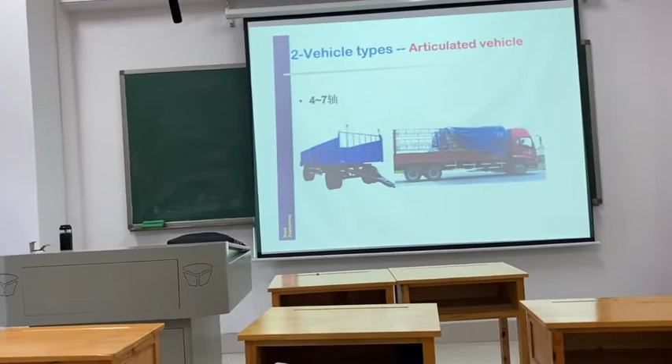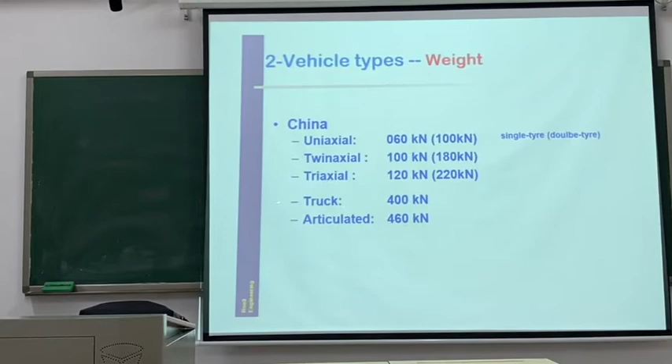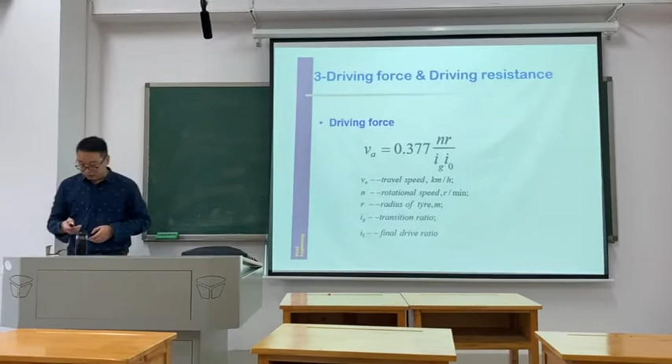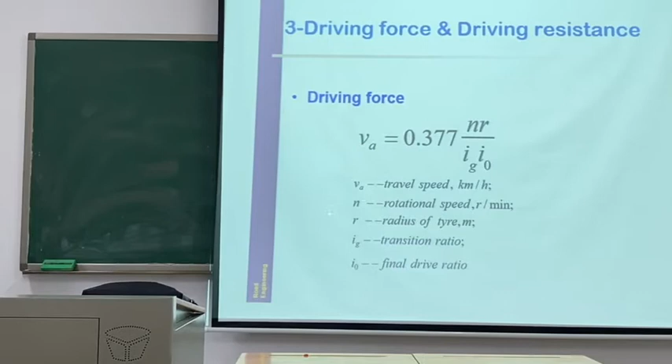Now we talk about driving force and driving resistance. Driving force, travel speed is equal to 0.377 and rotation speed, radius of tyre, IG is transmission ratio, i0 final drive ratio. So when we load these parameters, we can know VA.

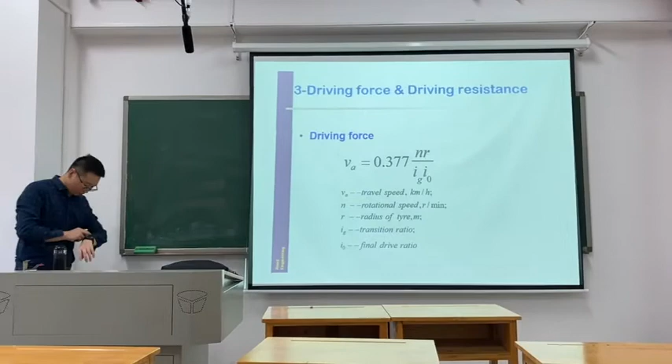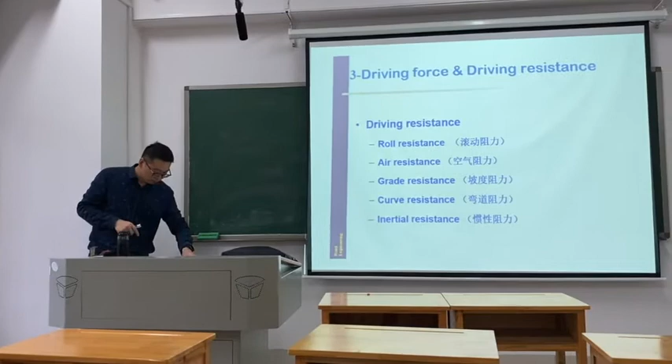Driving resistance includes 5 aspects: rolling resistance, air resistance, grade resistance, curve resistance, and inertial resistance. In Chinese: rolling resistance, air resistance, grade resistance for different grades, curve resistance is just like a curve, and inertial resistance.

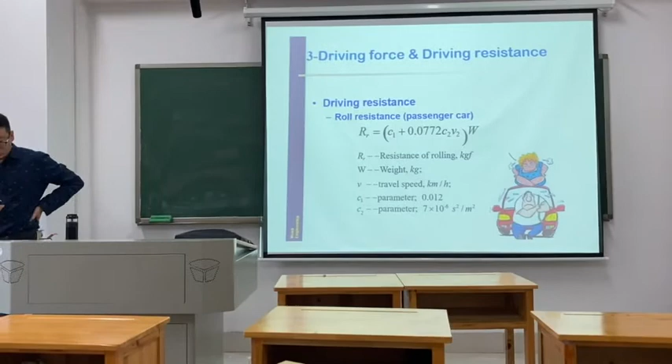What is rolling resistance? Just for passenger cars, you can know that rolling resistance is the weight. Parameter C1 is 0.012 and C2 for passengers is just like this. So, travel speed, when we know the weight, travel speed, and the parameters C1 and C2, we can calculate the rolling resistance.

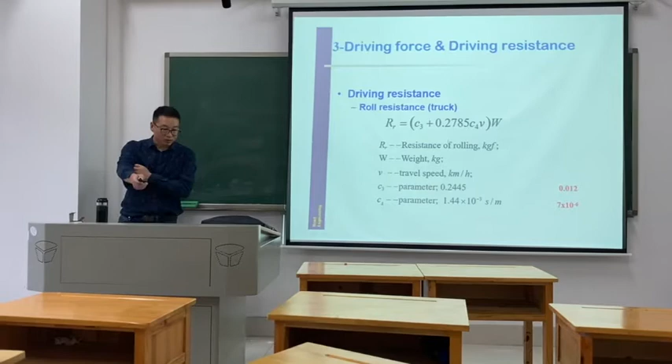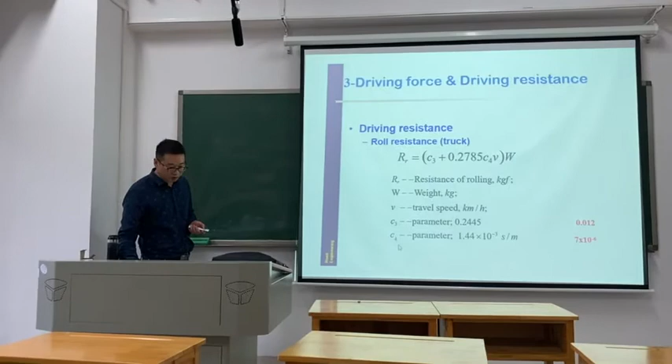But for trucks it is different. We can know these equations: weight, travel speed, C3 and C4, but this is different from the rolling resistance for passenger cars. We can know that C3 and C4 is larger than C1 and C2.

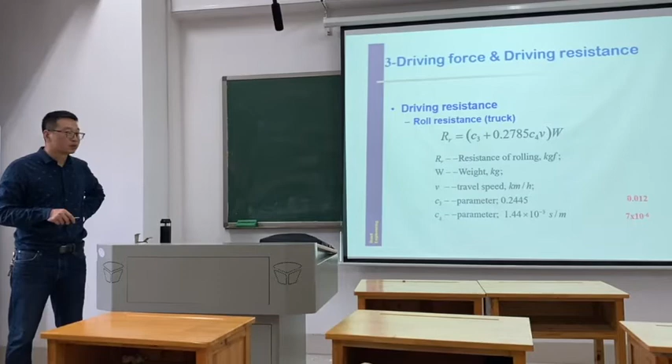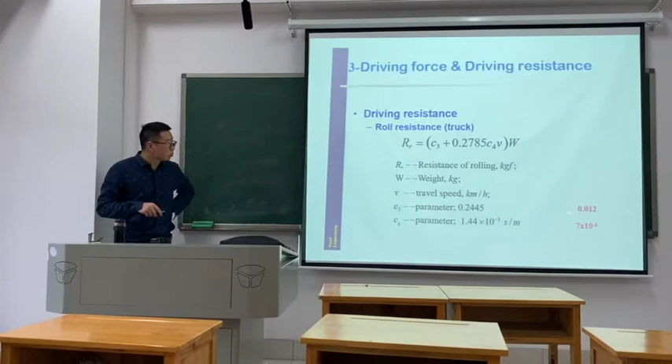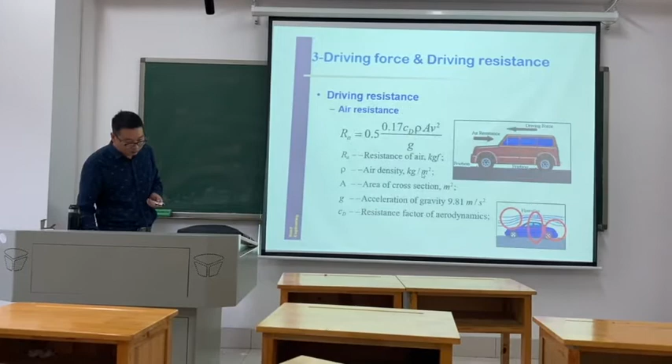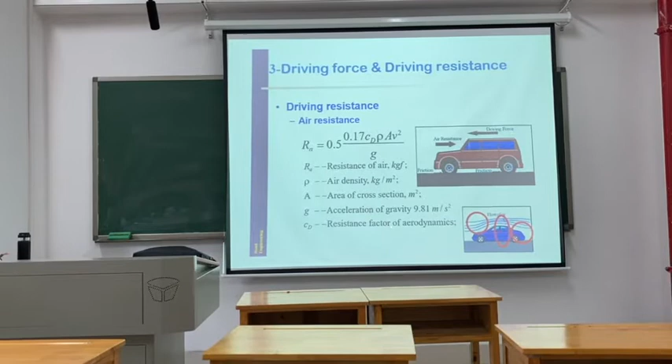Air resistance. Now, air resistance is determined by air density, area of cross section, acceleration of gravity, and resistance factor of aerodynamics. But the resistance factor of aerodynamics is different for different types of cars. The area of cross section depends on the type of car. So we can know this.

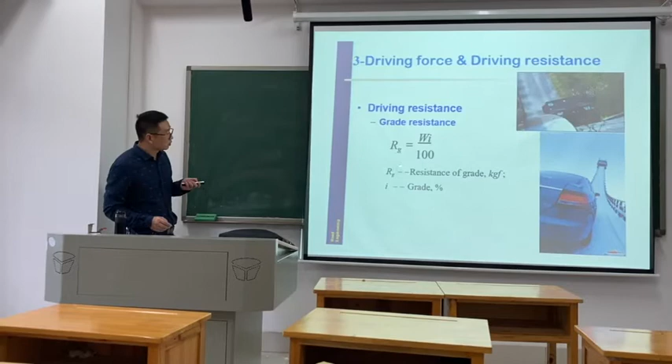Grade resistance. The grade of a road is different for expressways - the grade is less than 3%. But for low grade roads, it may be up to 8% or 9%. So grade resistance is calculated according to these equations. Resistance of grade, W is weight, so we can calculate it according to these equations. The larger the grade, the resistance of grade is large.

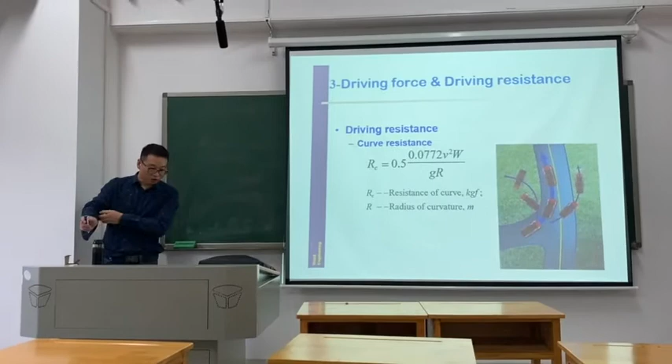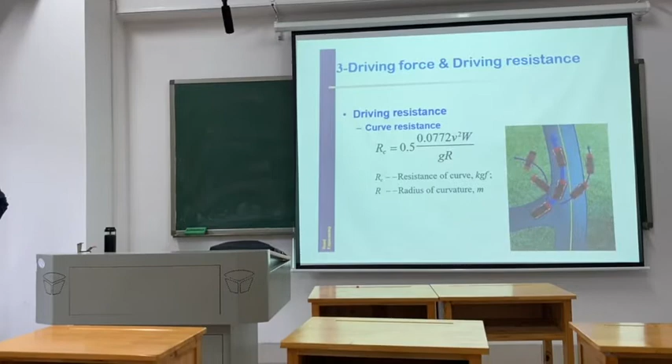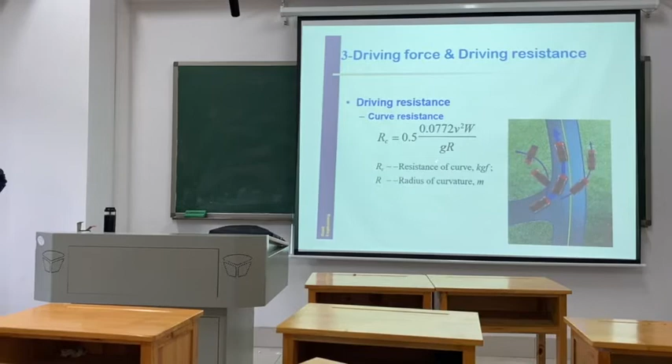Curve resistance. Curve resistance is given by speed, weight, V squared. W is weight, G is gravity, R is radius of curvature. So the larger the radius of curvature, the smaller the curve resistance. When we know the speed, car weight, gravity, and the radius of curvature, we can know the curve resistance.

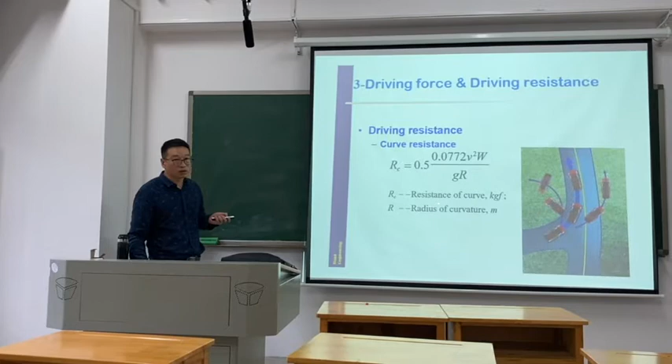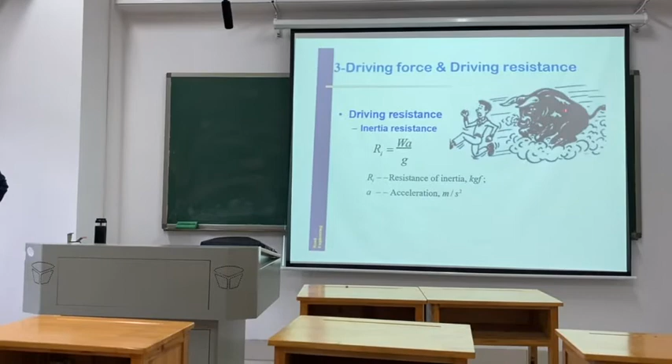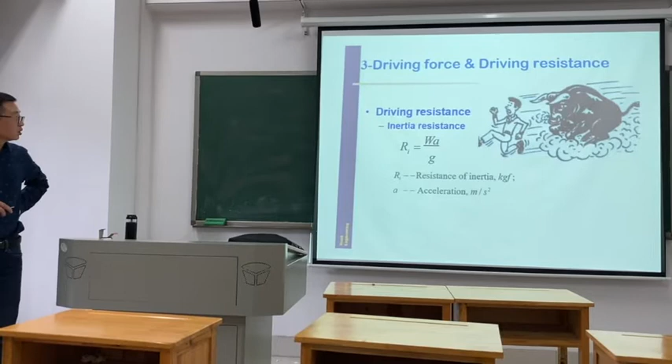Inertial resistance. Acceleration, weight, acceleration, and gravity - just like this. In inertial resistance, we can calculate it by these equations.

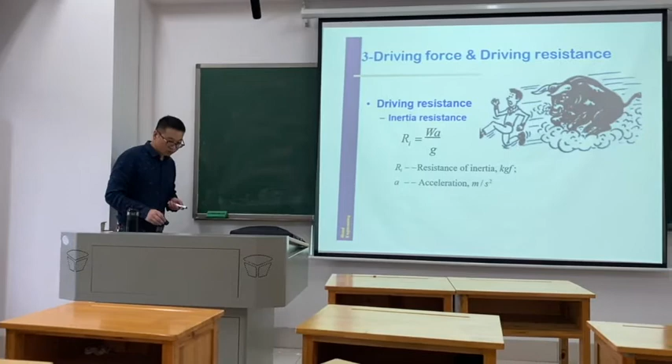Now, driving resistance is the total driving resistance - rolling resistance, gravity. Driving resistance is minor in this aspect. Main factors are weight and speed. So when the weight of the car is large, the driving resistance is... what? Large.

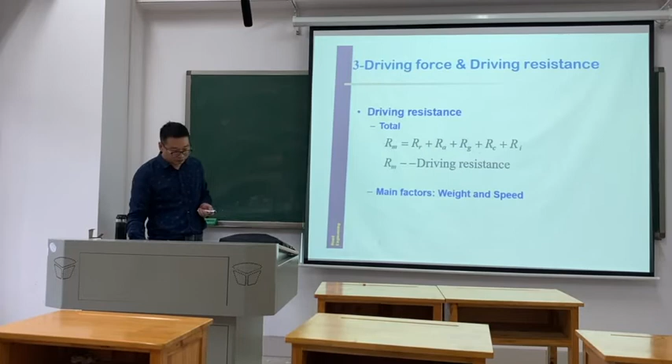Acceleration - we discussed these 5 aspects. One is overtaking lane. What is the meaning of overtaking lane?

For a certain expressway, in one direction, there are 3 or 2 lanes. The overtaking lane is next to the central divider. We use this lane to pass. It's next to the center, right? Yes, an extra space just for you to pass.

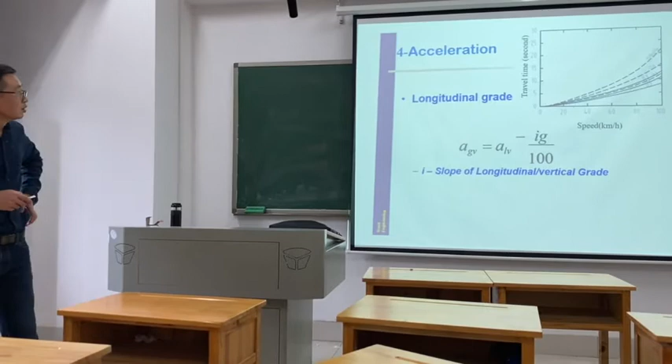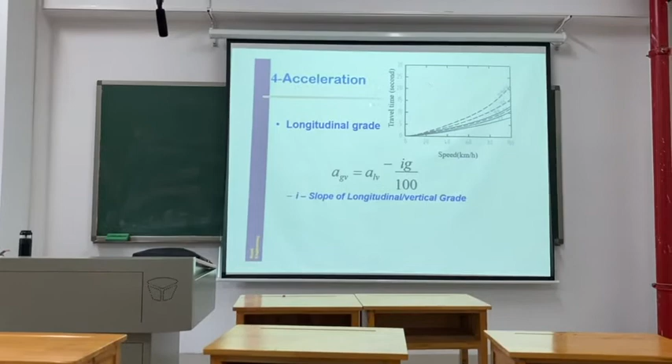For a road, we have longitudinal or transverse alignment. Longitudinal grade, we can see from this figure, we can know that with the speed increasing, the travel time is increasing.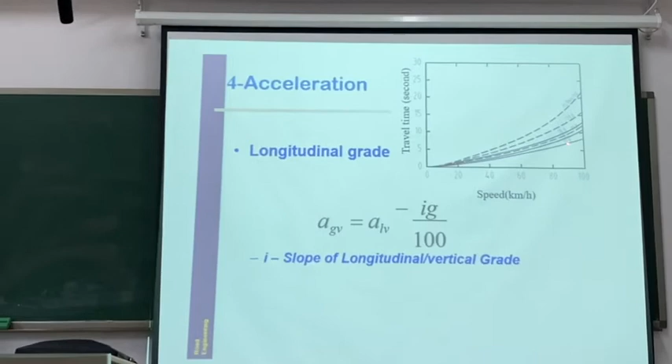For example, for grades, this line is for 11.3 longitudinal grade, and the speed of 60 kilometers per hour, and the travel time is close to 4 to 5, about 4 seconds. But at the same speed, for 15.9, it is about 10.

So the slope of longitudinal or vertical grade - we can know the grade for each vehicle. A longitudinal vehicle, just use these equations, we can calculate every vehicle.

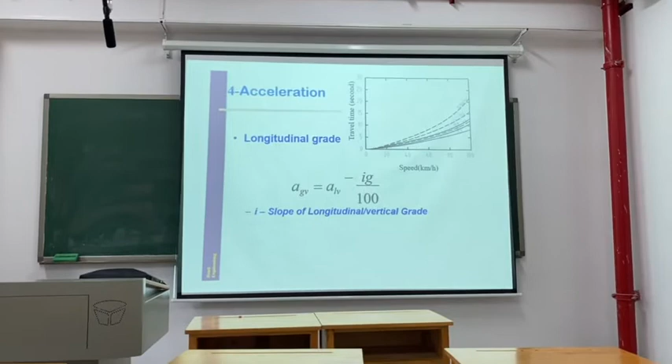Acceleration of... signal control: yellow time, stop time, and road length. Maximum is 3.0 meters per second squared. Emergency, friction resistance, and side friction.

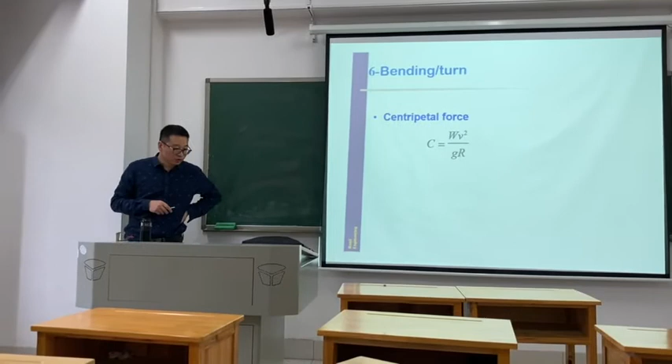We can know bending or turn centripetal force. Centripetal force is determined by this equation: weight, W is weight, vehicle speed squared, gravity, and R is radius.

We can discuss bending, turn, super elevation. Do you know what is super elevation? No? You can imagine - we can discuss this in detail.

Super elevation is tilting the roadway to help offset centripetal forces developed as the vehicle goes around a curve. Along with friction, this is what keeps the vehicle from going off the road.

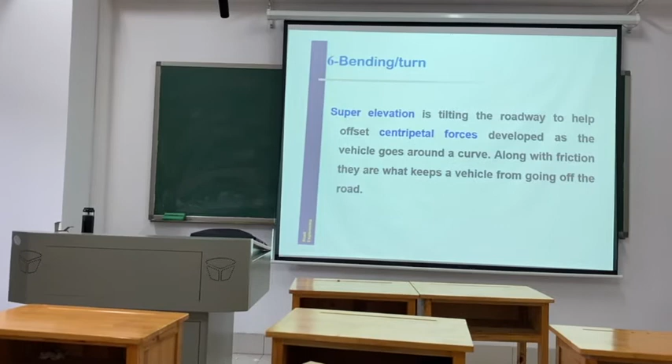If we don't use the super elevation, something like this - like a circle road, the car goes like this - is very dangerous. If we can use the super elevation...

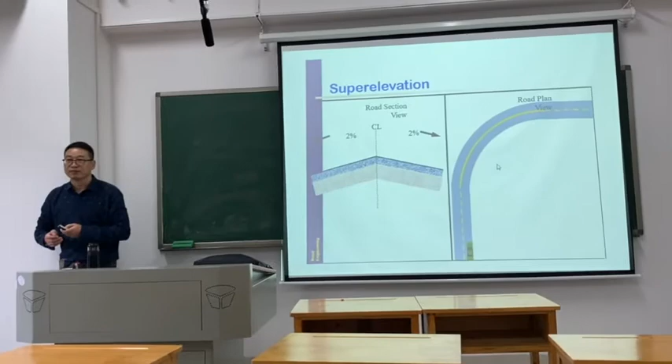Just like this. In normal sections, the road is like this - this is the center line. The road section has a 2% transverse grade.

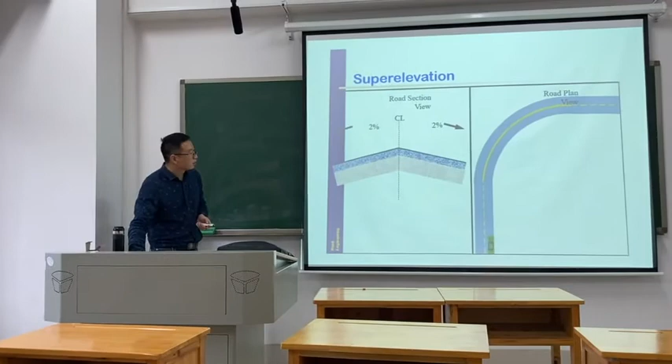We can note from these three. In normal sections, the road cross section is like this, but in circle areas, it comes to this. This is the goal of this circle, which is turned to this cross section.

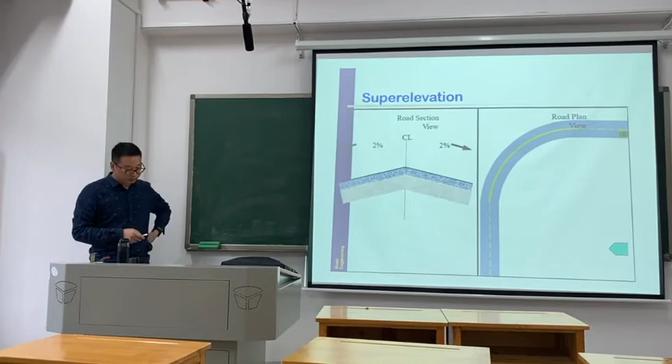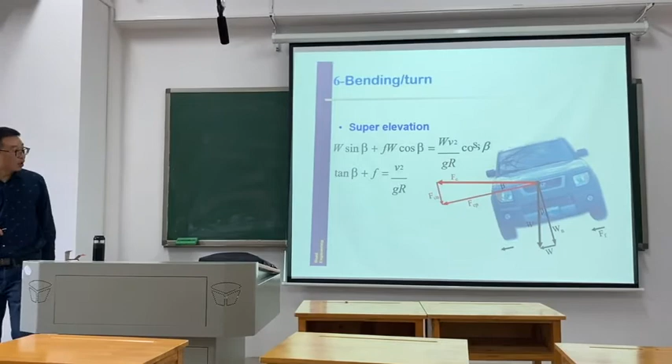Superelevation we can know through this picture, just like we can know from this picture the car has the weight.

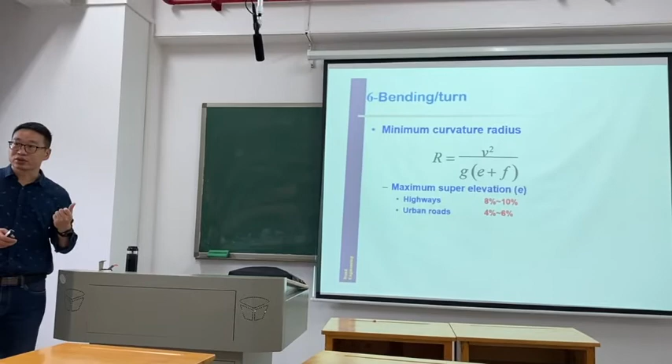In the transverse, next classes, we'll discuss this in detail.

Minimum curvature radius, just like this. Maximum superelevation height is 8% to 10%, but for urban roads, it's 4% to 6%. It is different for different kinds of roads.

Minimum curvature radius, it's like friction resistance comfort. It's 48 kilometers per hour to 113 kilometers per hour. On this range of speed, it is comfortable. So this is friction resistance, we can calculate it from this equation.

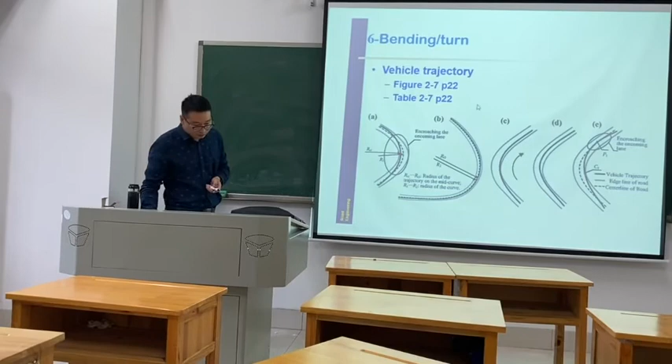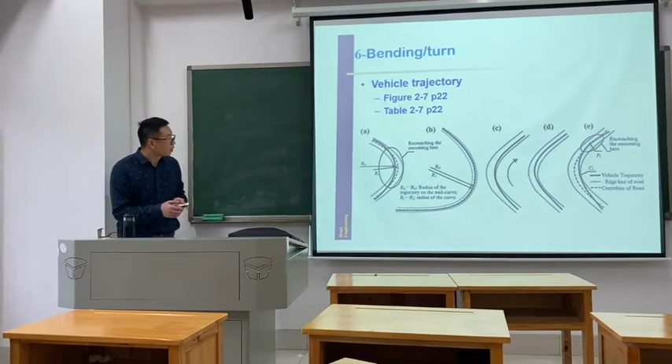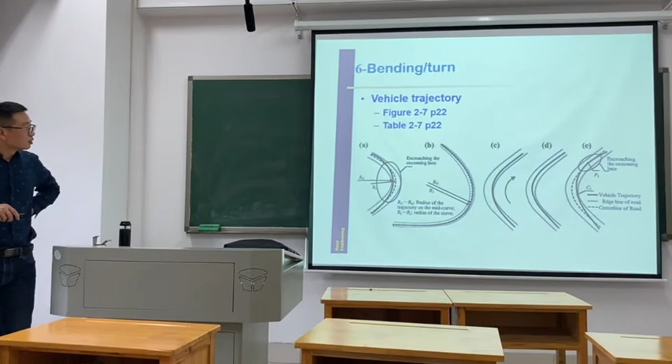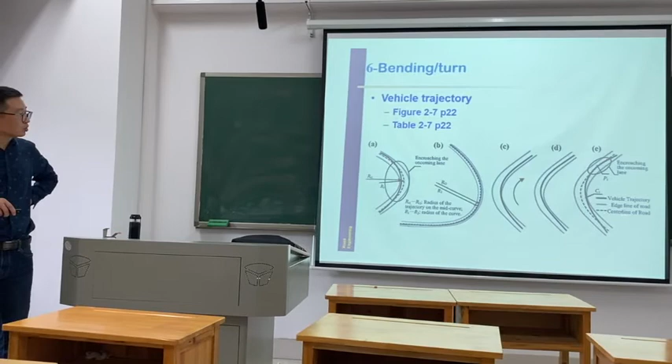Now this is vehicle trajectory, we can know this, encroaching the oncoming lane. Radius of the trajectory on the mid curve, radius of the curve, just like encroaching the oncoming lane. The vehicle has different lines, just like this line is the vehicle trajectory, this line is the edge line of the road, and this line is the center line of the road. So the wideness of the cross section is changing.

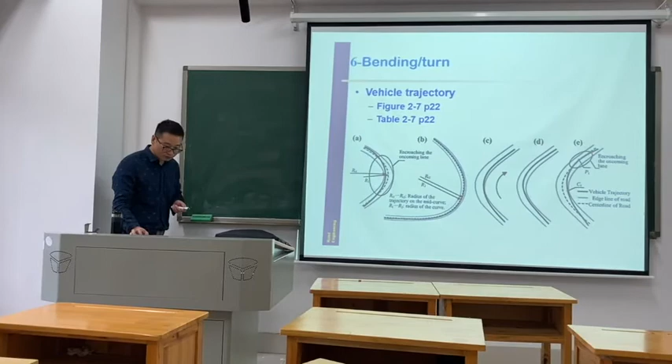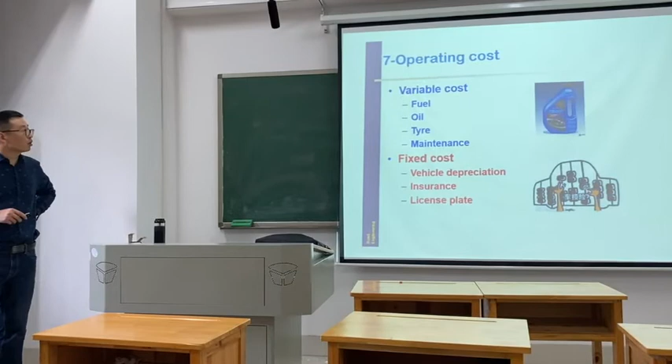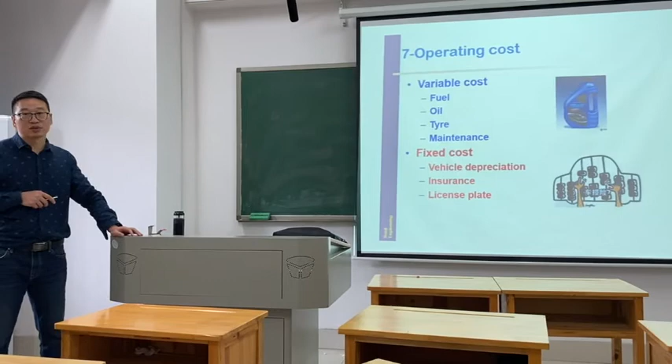Operating cost: variable cost of fuel, oil, tire, maintenance. So when we use a car, we consume fuel. It is consuming fuel, oil to make the car run. Fixed cost is different from variable cost, which changes. Fixed cost includes vehicle depreciation, insurance, license plate.

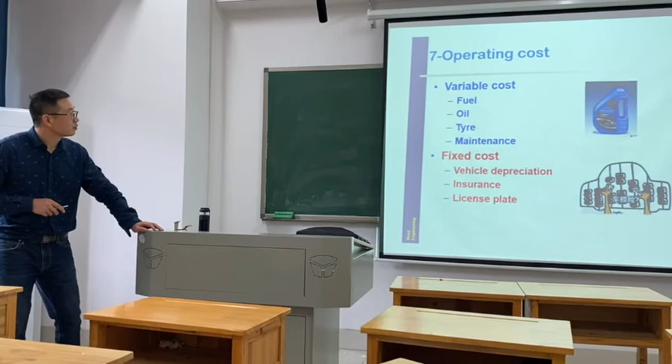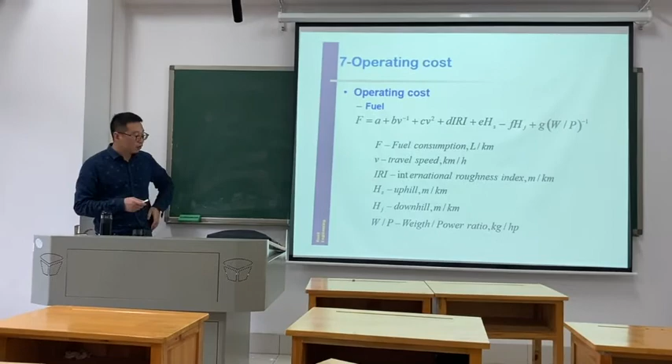This is the operating cost. Operating cost is fuel, fuel consumption as liter per kilometer. V is travel speed, IRI is international roughness index, uphill, downhill, and weight per power ratio.

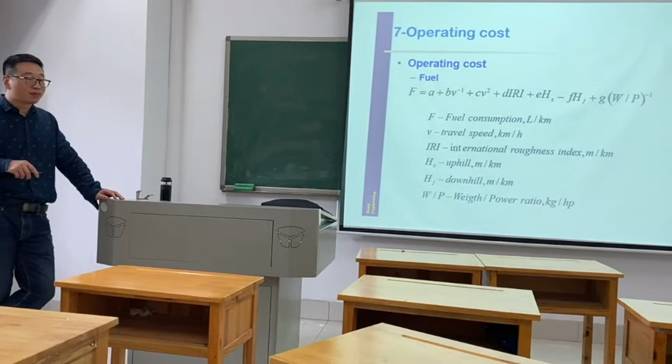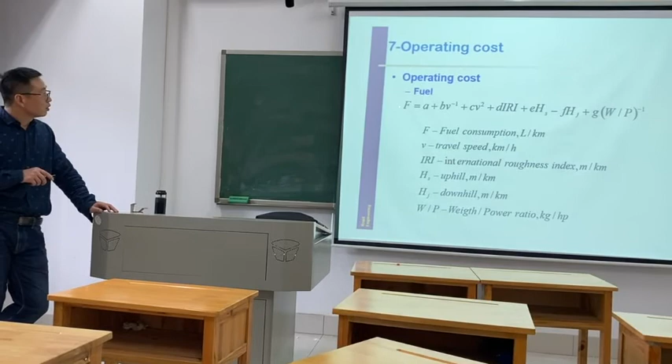So we can use this equation to determine the fuel consumption of operating cost, if we know these parameters.

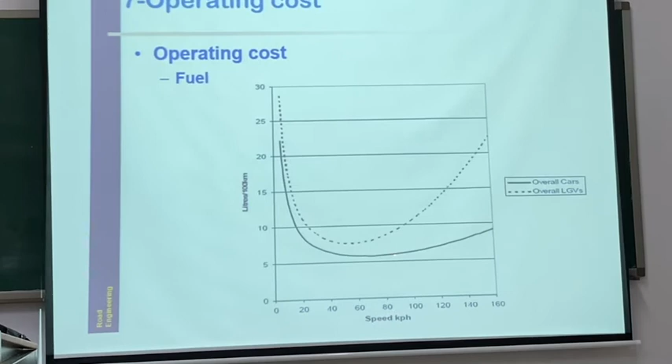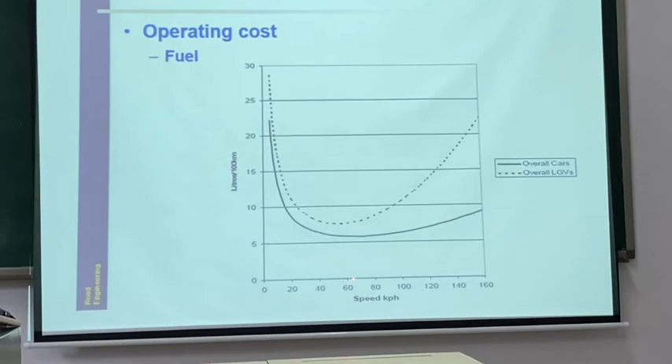If you are traveling at a higher speed, the liter of fuel you use is reduced first, for cars. But after the speed is higher than 80, like 100 kilometers per hour, it has to increase. So when the speed is 80 kilometers per hour, the fuel consumption is very low, it's efficient.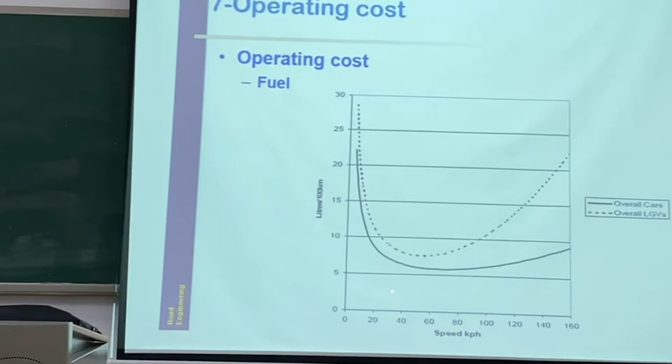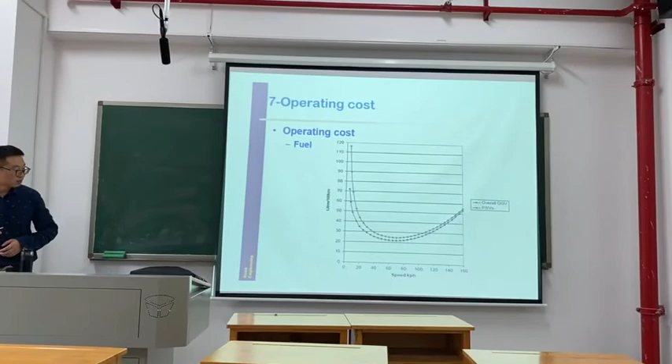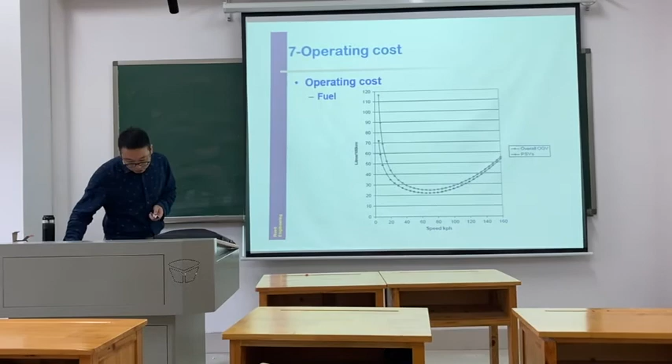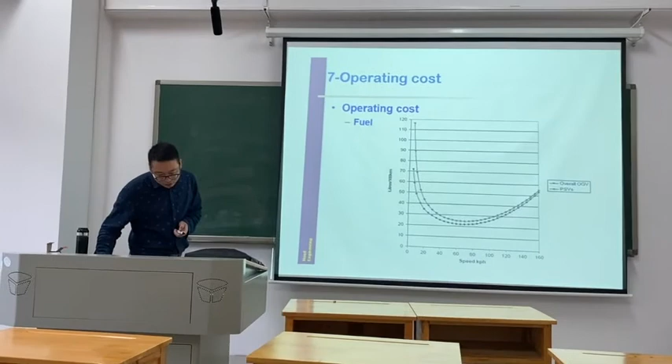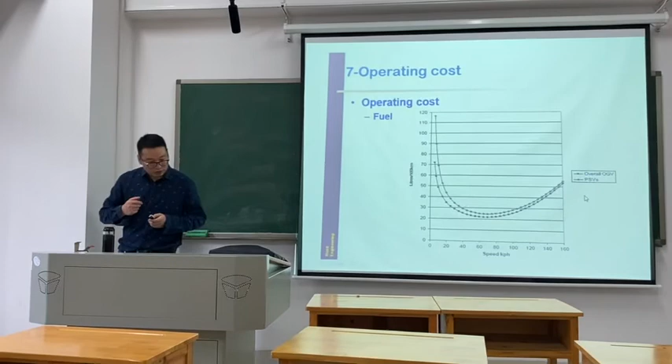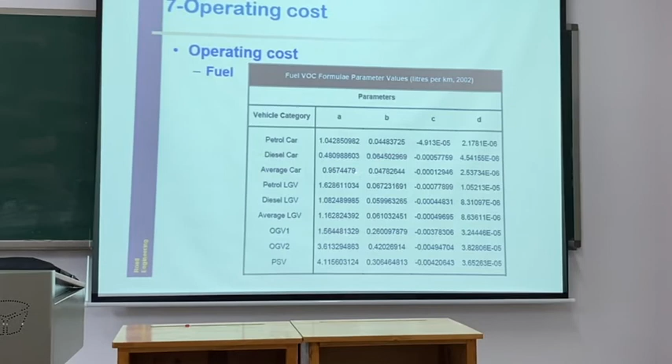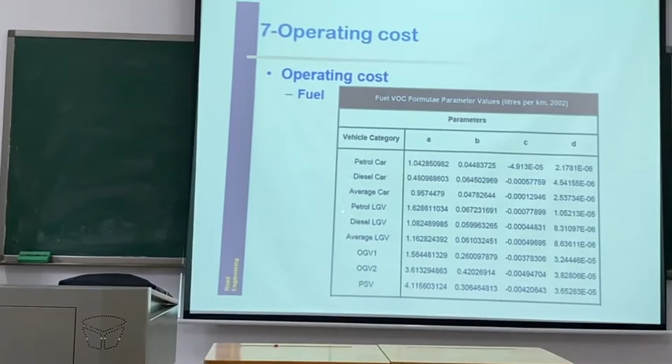Now from this figure we'll see fuel VOC formulae parameter values, liter per kilometer, it's 2002, it's from this. This looks very complicated, we should know these parameters when we determine different average car, diesel car, petrol car, for different cars.

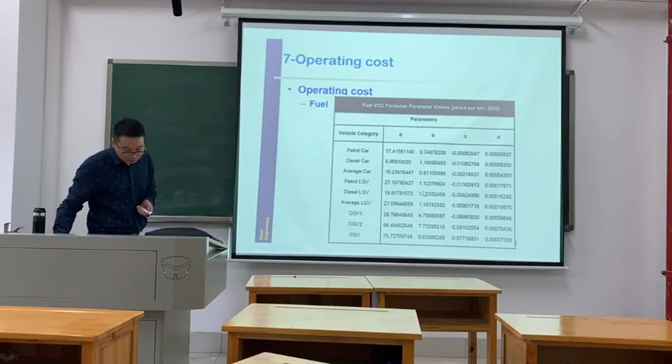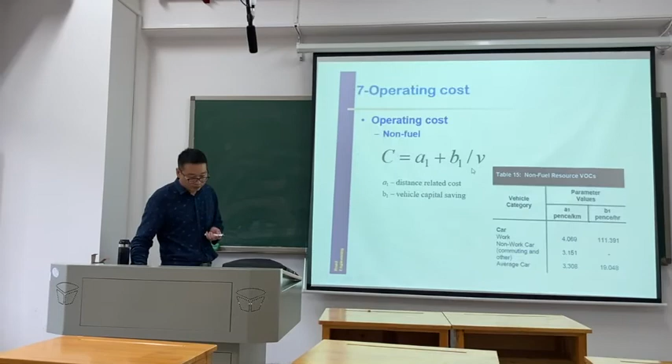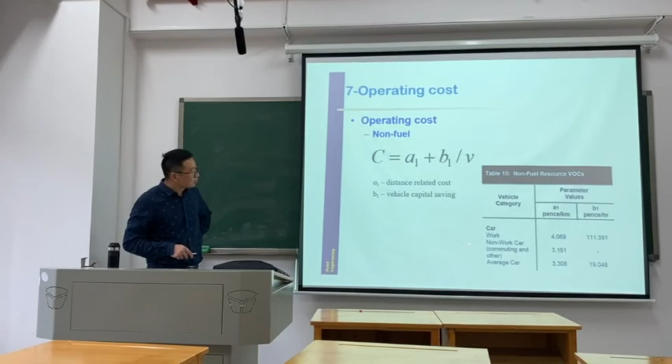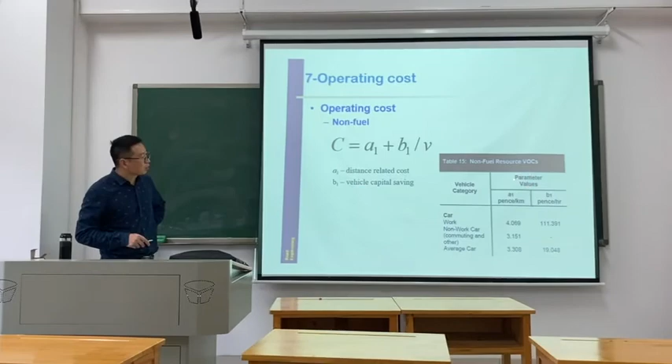Non-fuel cost, just like distance-related cost and vehicle capital saving, just like this table. It is pence per kilometer, pence per hour. We can know what car or average car when we know these two parameter values. Distance related cost is oil, tire, maintenance, etc., and fixed cost per kilometer is related to this.

Now, this is all about this class. Class is over.

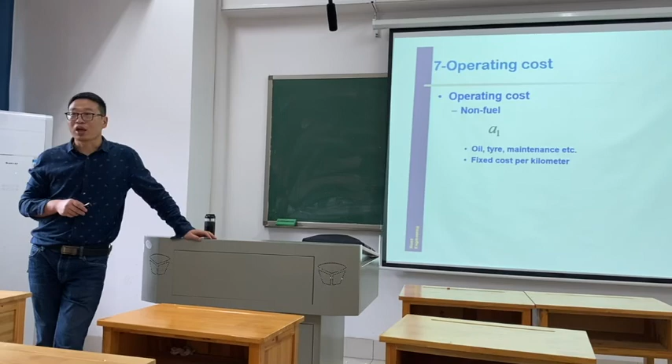Now we have 8 days off on National Day. Yes, yes. With this weather, so that's what's going to happen. What plans do we have?